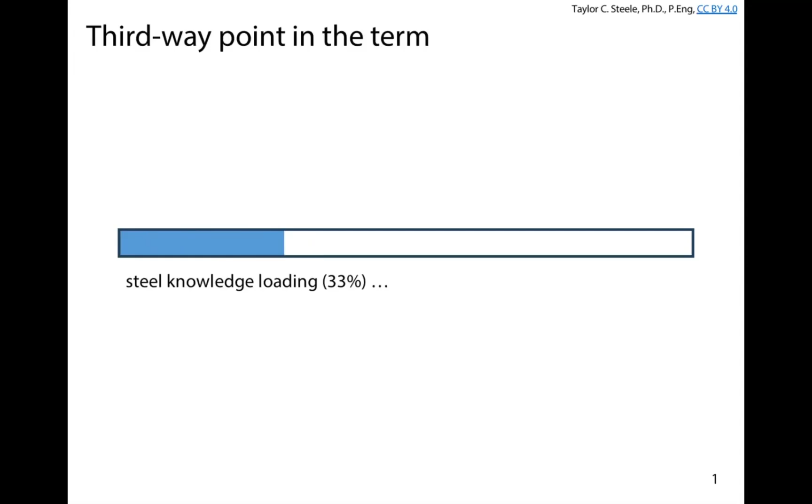Last day, we introduced the idea of designing, or starting to figure out what the strength of our tension members might be for our braces, for example. We looked at a couple of expressions — when something's in tension, we're pulling it apart. We can pull it apart in gross section yielding. This was the expression we used to calculate the gross yield resistance of the cross section. We wanted to stop the brace from yielding, because if the brace yields, it's going to stretch a lot, and that takes away the structural stability of our building when it's pushed laterally under wind, for example.

We also looked at net section fracture. One of the big differences, despite the fact the equations look similar, is that here we're looking at actual fracture, complete breaking apart of the cross section where it's reduced to accommodate the bolts. We need to connect these things somehow — when we poke holes in our braces to bolt them to the gusset plate, we're getting rid of some steel. So the area is smaller, but we let it yield locally a little bit because that's not really going to impact the stability of our structure. But once it reaches its ultimate breaking strength, there's nothing we can do — we lose all load carrying capacity, and there's nothing left to prevent the building from falling over.

The other big thing here was that one is a ductile mechanism, the other is a brittle mechanism. When we're dealing with ductile failure of structures, we want that to happen — not that we want failure to happen, but if it's going to happen, we want it to be ductile. So we had a different resistance factor, a slightly higher factor for yielding compared to net section fracture — 0.9 as a resistance factor for yielding, 0.75 for net section fracture — because we want to encourage a ductile failure mechanism to develop, if there is going to be failure.

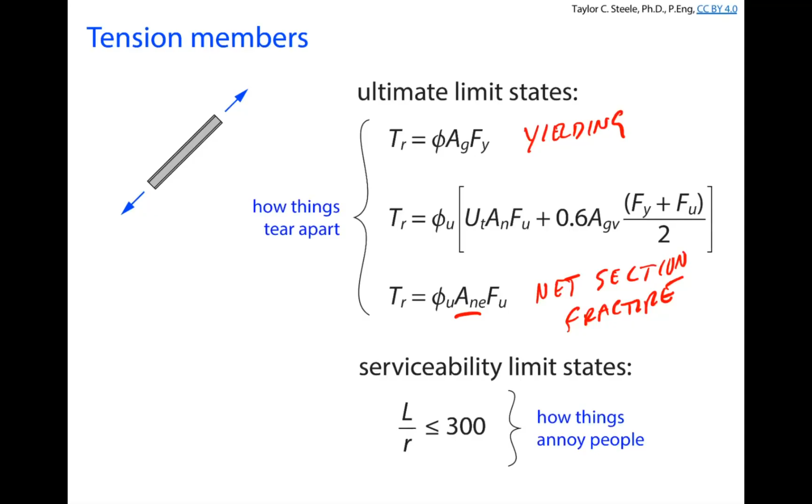Today we're going to talk about how the net effective area can be different depending on the bolting arrangement. We're actually going to see that there's more than one potential way we could get net section fracture to develop through our bolt holes. That's basically what we're talking about today — when the bolts are arranged in a certain way, how does that change the calculation for our net area in tension. The other day we introduced tension members and talked a little bit about net area; today we'll focus more on when it may or may not be different compared to what we looked at previously.

For example, in lecture the other day, we looked at this situation: a very simple pair of flat bar steel plates bolted to a thicker central plate. You saw in the video, once it fractures, it pretty quickly loses all load carrying capacity, and it tends to fracture across this net area through the bolt holes. The other day we looked at calculating the net area for an example brace in that school across the river, and found that was in fact the governing failure mechanism for that particular brace.

This is a very simplified case. I'd say most of the time it's probably good practice to arrange your bolts in some kind of rectangular pattern. It's easier to fabricate, easier to put together for the most part, and relatively simple to detail.

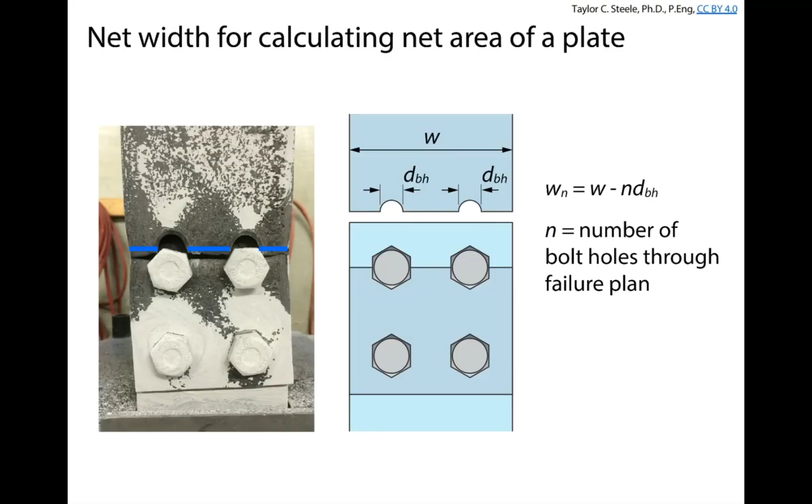From time to time, we may want to introduce something called a stagger in our bolt hole pattern. The reason we might want to do this is because it's possible to increase the net effective area. We're moving from a failure plane where we're removing 2 bolt holes from the net area to a potential failure plane where we're only removing 1 bolt hole.

If it's hard to make a connection work—for example, the specific brace in the example the other day, where maybe we want to resist a load higher than the 580 kilonewtons we were designing that flat bar brace for, and maybe the engineer didn't give us enough steel—remember, the engineer tells us what this needs to be, say a flat bar 15 by 150. Then you have to design a connection for that flat bar, and if you can't make a rectangular bolt hole pattern work, you may introduce a stagger to increase the net effective area.

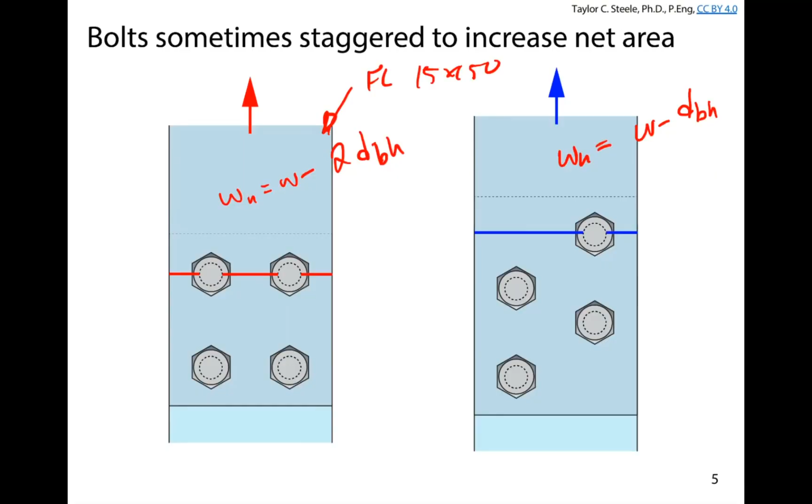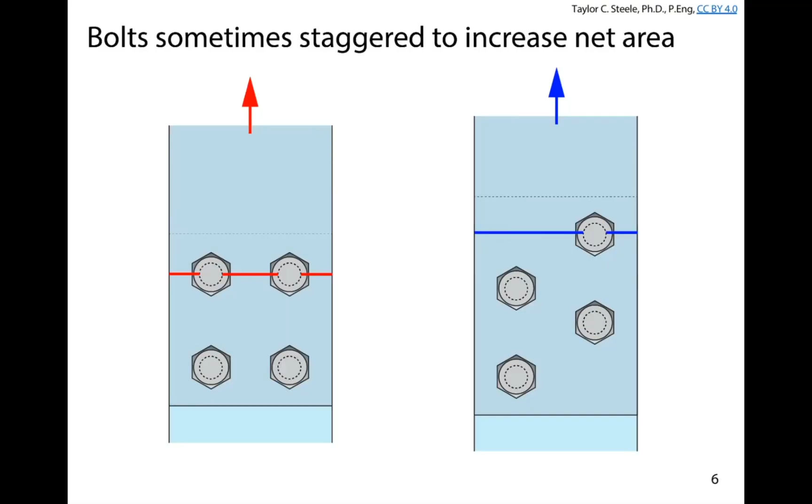By doing this, we're saying Wn in this case would be W minus a single bolt hole diameter, whereas in the other case Wn is W minus 2 bolt hole diameters. So we can potentially increase the net effective area by staggering the bolt line. The problem is that not only do we have the potential to get rid of one bolt hole, we also introduce the potential for two different failure planes—if we're not getting enough area through this bolt hole, the stresses may want to go back through that other hole, even if it's not aligned with the original.

Here we have one potential failure plane where Wn is W minus 2 bolt hole diameters, dBH. Up here we have another where Wn is W minus 1 bolt hole diameter. And down here we've got an interesting case—how exactly are we supposed to handle this situation? This looks a little weird, and it's not something we've looked at yet.

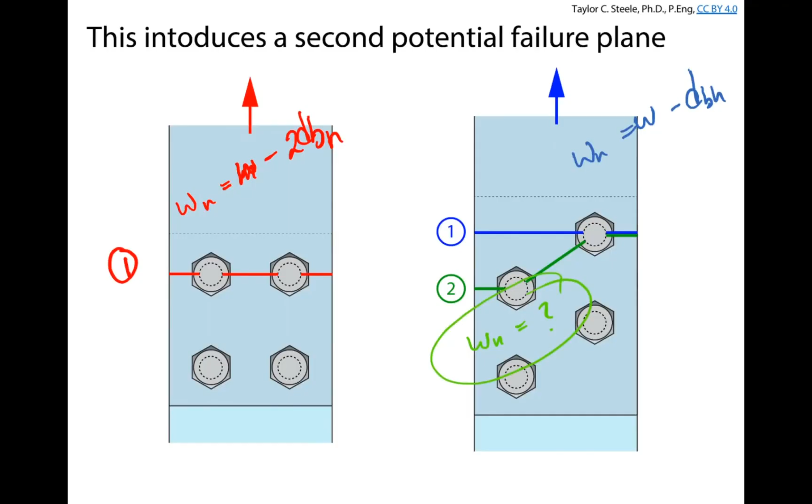Today we're going to talk about what happens when we start to stagger bolt holes. The motivation is to potentially increase the resistance to net section fracture, but in doing so we introduce new potential failure planes. It's our goal as the engineer to determine which failure plane is critical—how will this connection actually fail through these different planes—and how we introduce new calculations to figure out the increase in area.

I have an example here from those same connections I showed in the introductory lecture last Friday, with different bolting arrangements. I had one where the bolts were arranged one way, and another where I arranged them in an opposite symmetric pattern. When I pulled those apart, for the bolt hole pattern where the two bolt holes were closest to the load, we had net section fracture similar to what we looked at the other day.

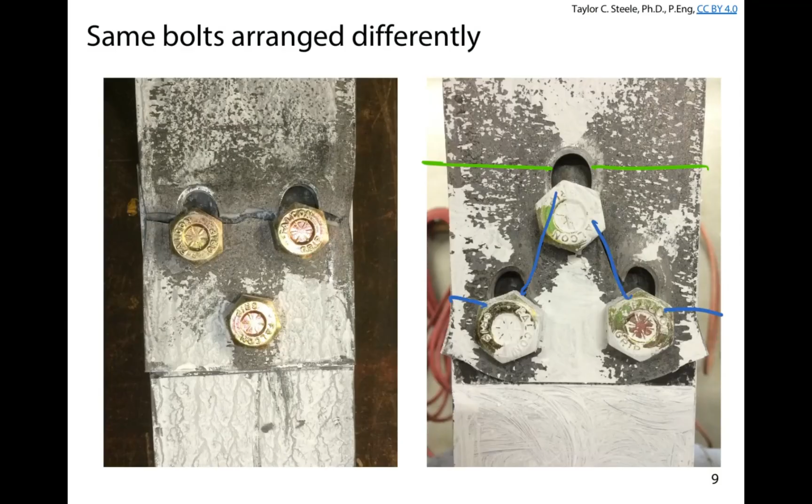But when we flipped the bolts the other way, we got a completely different failure pattern. There was potential to fail this section through the first line up here, and also potential to fail the bolts through something that looked more like this. So how do we handle these situations, and how does this change the resistance of our tension members?

After today, you should be able to identify these different failure planes when we introduce a stagger in our bolt hole arrangement, calculate the net area for different identified failure planes, and identify the critical net section. We'll say here are three potential failure planes—how do we calculate the net areas, which net area is smallest, because that's where stress will be highest—and calculate the net section fracture capacity for that bolt arrangement for that particular tension member.

Does anyone have any questions about these three things, why they're important, or what this staggering of bolt holes business might be about, before we get into the technical content for the morning?

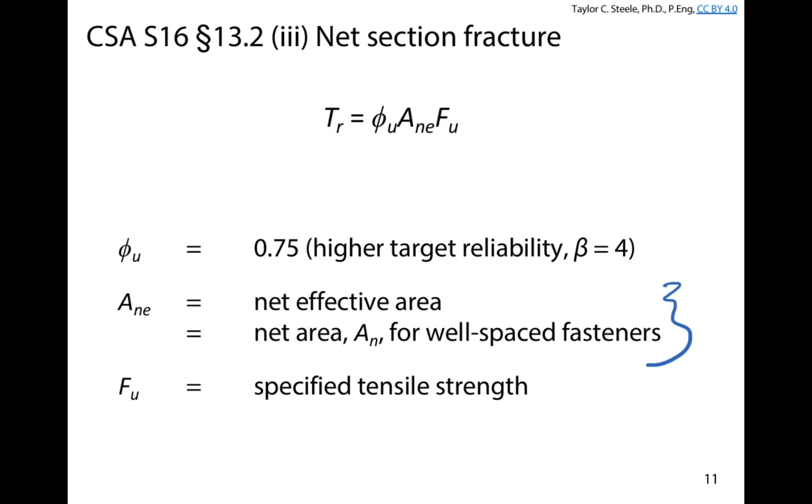So when we're dealing with these kinds of connections, we actually have a new part here. The other day I only showed you for a segment normal to the force, net area is W net times the thickness. But when we have segments that are inclined to the force, that's when we have a stagger. We've got some segments that are perpendicular to the force, and we've got one that has an inclined section to the force.

What we do is we calculate the same thing, WNT, as if there was no such stagger. I'll show you what that means in a minute. So we've got the net effective width as if it was straight through, or the whole section was perpendicular to the force. But when we have an incline, we're going to add on this empirical term.

You would like to think that when you have an inclined segment, the stress transformation kind of changes the way we do calculations, but we don't have any kind of stress transformation. This is actually an empirical equation that came from the early 1900s, and we've had more than 100 years and we haven't found a way to do this any better than what we've been doing since basically the 1920s. So we add on this additional term that basically deals with the geometry of that stagger.

We've got a gauge, which is basically the distance between bolts perpendicular to the load. We've got a pitch, which is the distance between bolts parallel to the force. And this is how we're going to be handling these kinds of calculations.

We might have one incline, we might have two inclines, and I'll show you some examples of where these might apply in different situations. But the one thing I will say is that this works really well for simple connections like the flat bars we've looked at so far. W is pretty straightforward; we don't have to do any kind of fancy calculations.

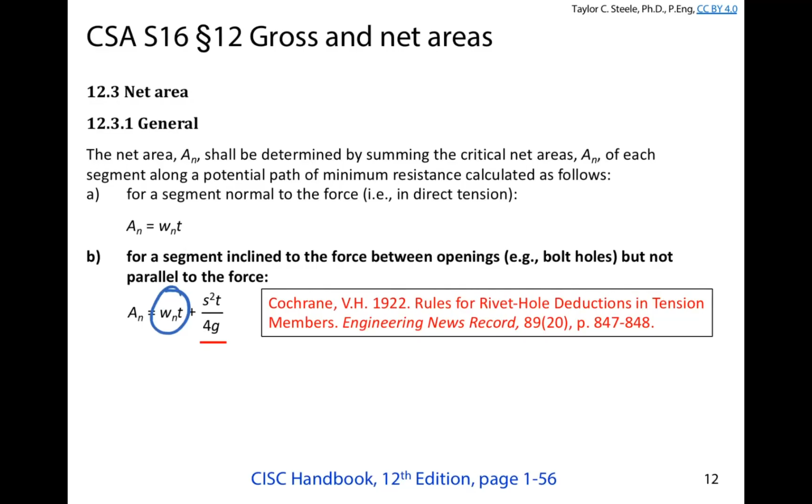The way it's written in the handbook isn't necessarily as clear as it should be; in fact, it's a little bit vague. So when I present it here, I include the summation sign. This is to account for the fact that there could be potentially more than one stagger, so we add the sum of the staggered components. If we have 2 or 3 staggers, for example, we need to add on the individual components dealing with that stagger that increases the net area.

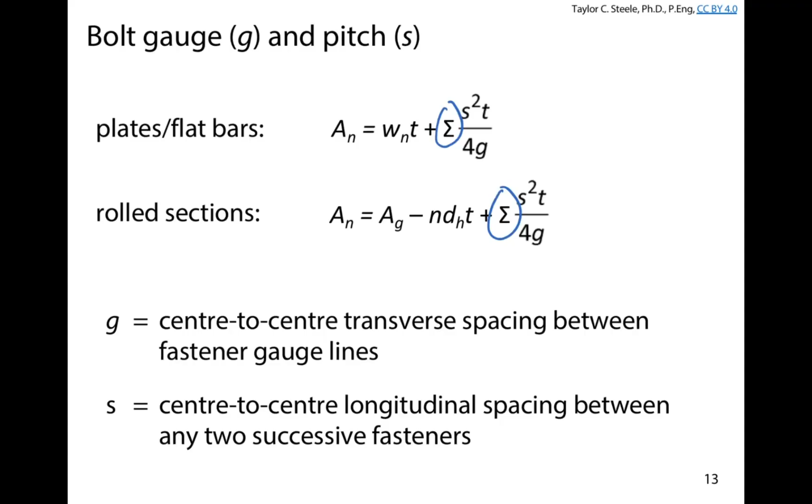Okay, so whenever you see S, you can just look at the slide. The most difficult thing to remember is which of these two things should be S and G. When you're saying, okay, I know it's S squared T over 4G, which of these dimensions is S and which is G? If you forget, you can just come to this slide. S is the pitch, which is the spacing between the staggered lines of bolts parallel to the load.

But then we add on this S squared T over 4G term. So basically we have the net area that we would have had if it was a rectangular set of bolts, plus the additional area that we might get from staggering those bolts by a pitch S.

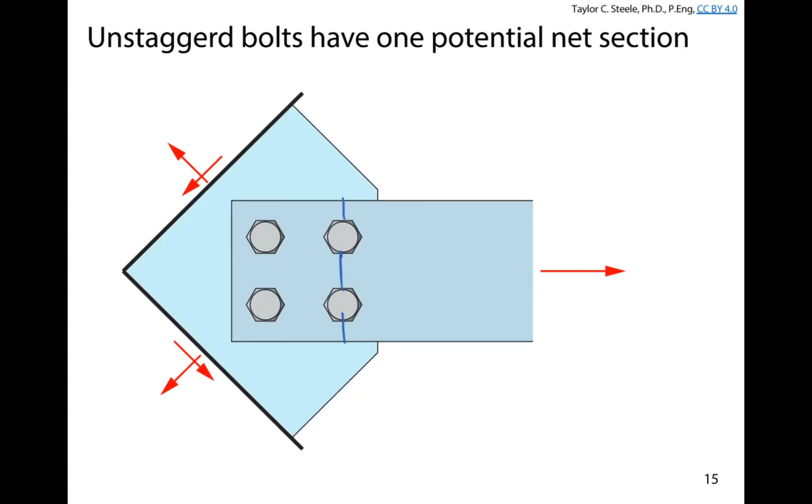first line of bolts that are closest to the load applied. Basically, what we expect to have happen when we have a rectangular set of bolts is it gets pulled apart across the first line of bolts.

And the reason for that is because steel is ductile as it approaches the ultimate strength, we're basically going to be assuming here, as we talked about in Lab 1 when we looked at the bolts in double shear or single shear for that problem on assignment 0, that these bolts all carry the load equally. So here we might have a factored tension force, 1.4 wind plus some other notional lateral loads or something like that. And we're basically going to assume that we have TF over 4 here, TF over 4, TF over 4, and

TF over 4. And if that's the case, if we look at a section back here, basically the stress that's going to be on this component, or going through this last line of bolts, if we draw the free body diagram, we have TF over 2 pulling to the left. So the stresses through this net section at the back, furthest from the applied load, are going to be half what the section experiences at the net section closest to the applied load.

Okay, so here we're assuming that the bolts share the load equally. And so by statics, there's no other cross section on this area that's going to have a higher stress than the one that's closest to the applied load, through the first row of bolts passing through there.

For example, we're also not going to get something like this happening, because we have TF over 4, TF over 4, TF over 4, and TF over 4. Basically, on this section now, we only have 3 TF over 4, so we have 3/4 of TF, which is less load, and we're increasing the net area because on that failure plane we'd potentially have a stagger.

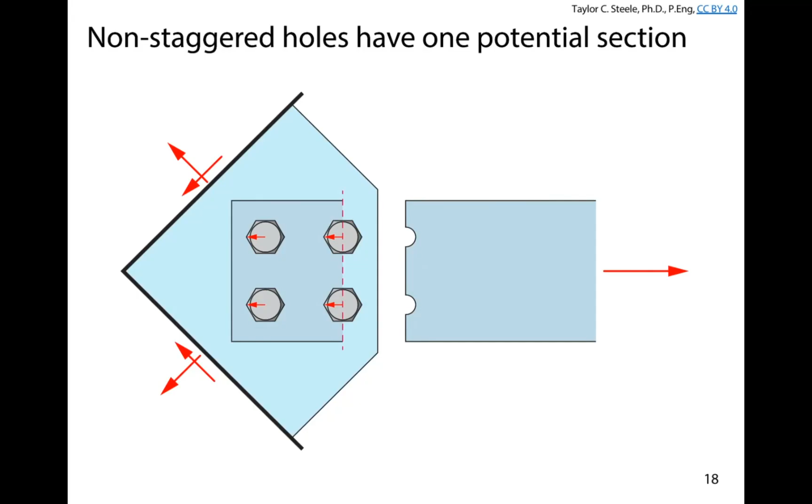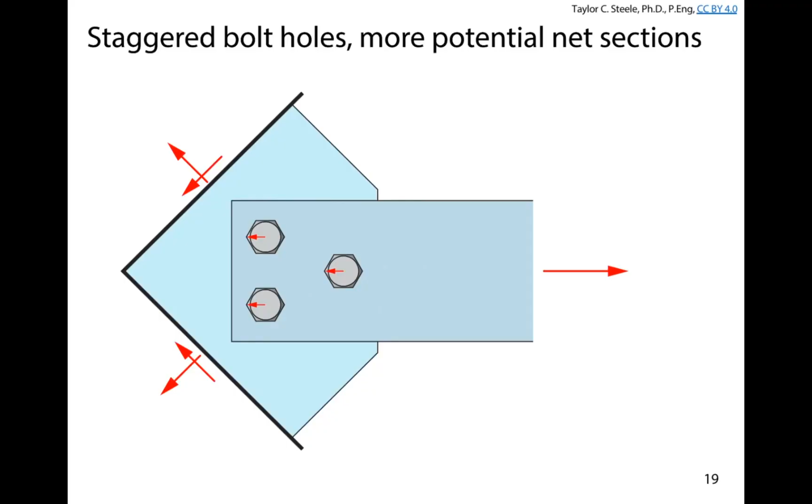When we start to increase a stagger - and this is not the best detailing, but it's nice to show academically what goes on here - now we've got a single bolt hole, and it's hard for us to necessarily determine what's going to happen here. It's possible that we'll get fracture through that first bolt, and that would be consistent with what we've talked about before.

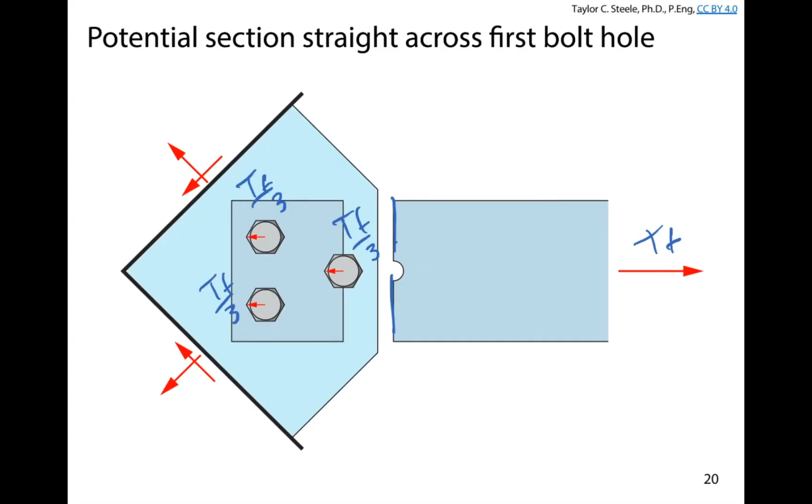In this case, we have TF, and we have TF over 3, TF over 3, TF over 3. Okay, so the bolts are sharing the load equally, and so the total force on this cross section is TF. We have TF over 3 on the other side, and we have a potential failure plane through that line of bolts. We would calculate this as AN equals W minus a single bolt hole diameter, times T, and that's it. We have no stagger on that particular failure plane.

It's possible to fracture the plane straight through that perpendicular section. We have one bolt hole and a perpendicular section, but it's also possible that we might fail at something like this, where now we're passing through 3 bolt holes.

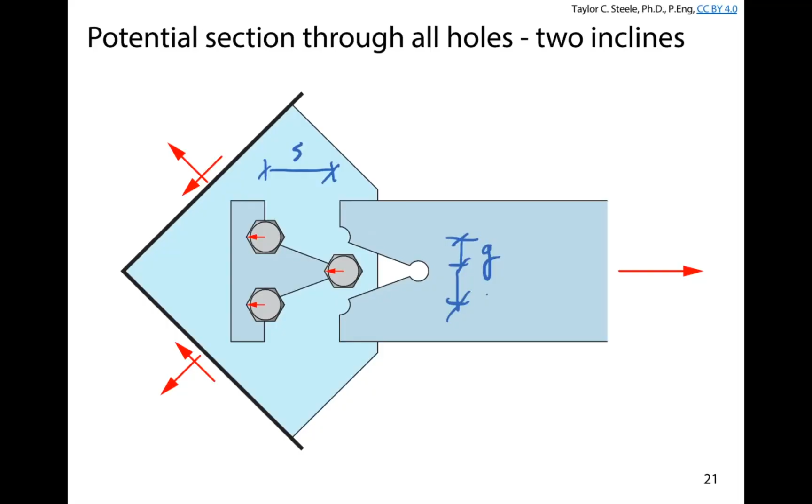So our net area gets reduced because now we're passing through 3 bolt holes, but we have stagger, and the stagger is going to increase our net area. So here, if I call this S, and if these were both G, let's just assume that G and S are both the same for both of these staggers here.

My net area would be W minus 3 bolt hole diameters times T plus 2 S squared T over 4G components. So this area, we don't know until we do the calculation if it's going to be bigger than the one we looked at on the previous slide, because we're removing more bolt hole diameters, since this plane would go through more bolt holes, but we're also increasing it because of the stagger associated with the incline segment between the first bolt and the back 2 bolts.

Basically we're saying, well, we're taking away 2 more bolt holes, but we're increasing some stagger. In our case here, we actually have to calculate this area. This might be AN1, for example, and we have to calculate this one, it might be AN2. The failure plane that's going to be most critical is the one where the area is the smallest, because when the area is small, the stress is higher, and we're more likely to get failure on that particular failure plane.

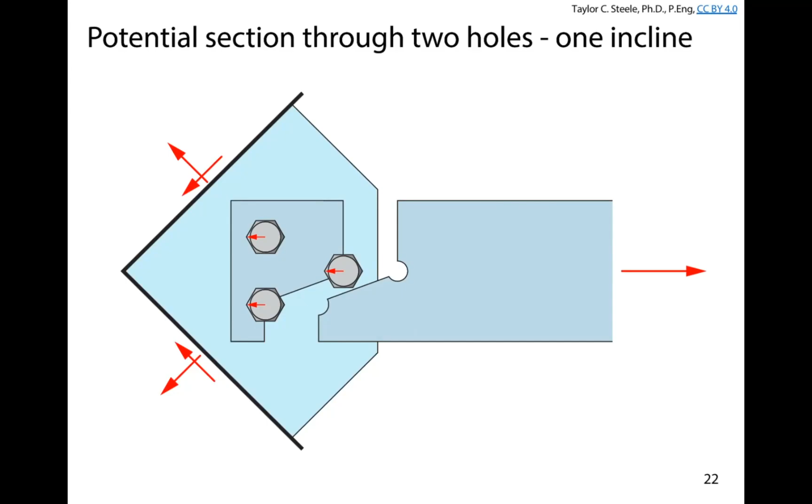Likewise, it's possible, I don't know how possible it is, but you'd have to calculate this - it's possible to get a slightly asymmetric failure plane. And so in our case here, now we've got just the failure through 2 bolt holes. So we might say AN3 is equal to W minus how many bolt holes for this particular case? 2. 2 bolt hole diameters times T. And in this case, we just have the single stagger on this failure plane. This is G, this is S, so we have plus S squared T over 4G.

So in our case here, there are 3 potential ways, and technically, if G and S were different for the other incline, there might be 4 potential ways for this thing to actually pull apart on the net section. It's important that we understand how to identify how we're going to potentially develop failure planes through each of these bolt holes, how many different failure planes we could have, and how to quantify the net area associated with each of these.

Basically, the secret is you never want to consider a failure plane where you still have a bolt that's basically attached to the piece that's pulling off, because that reduces the load acting on the remaining portion, and therefore reduces the load acting on the net section, and the net section almost always gets bigger. So a bigger area, smaller load - you know intuitively that that's not going to be a governing failure mode. A failure mode is one that can pass through any of the bolt holes as long as there are no more bolt holes attached to the piece that's getting pulled away.

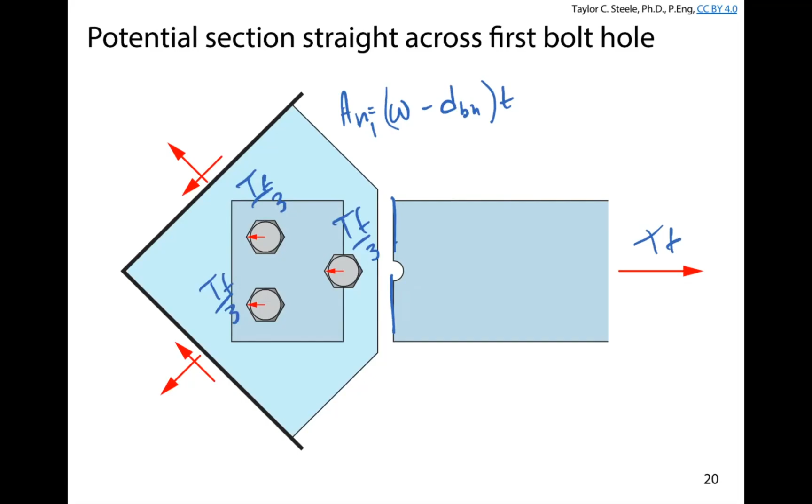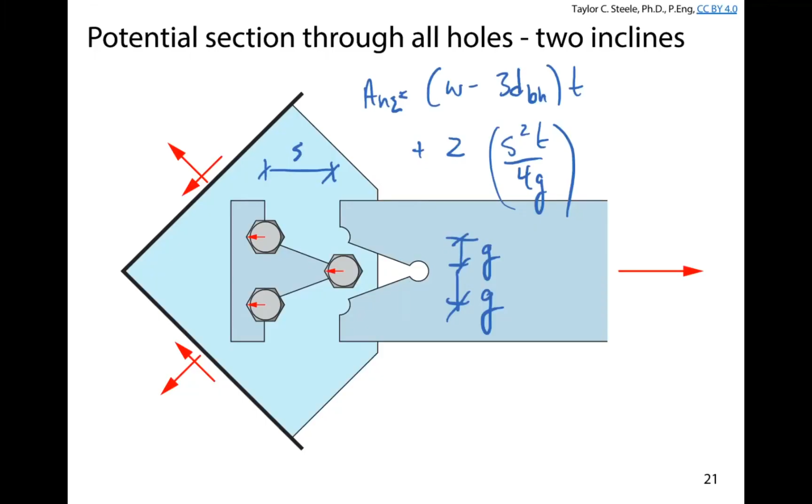So in this case here, this is a potential failure plane - we go through one bolt hole. This is a potential failure plane where we go through all of the bolt holes. And this is a potential plane where we go through two of the bolt holes, but never do we have a bolt left over on the piece that's getting pulled away. You should be able to cut this piece with some scissors through the holes and not have any full hole left on the piece that's getting pulled away from the applied factored tension force.

Does anyone have any questions about why these three failure planes are something that we should be investigating, or how we would calculate the net area associated with either or any of those three potential failures?

What would happen if one of the bolts pulled away with the other piece? What would be the significance of it? It wouldn't. That's the significance of it for the most part.

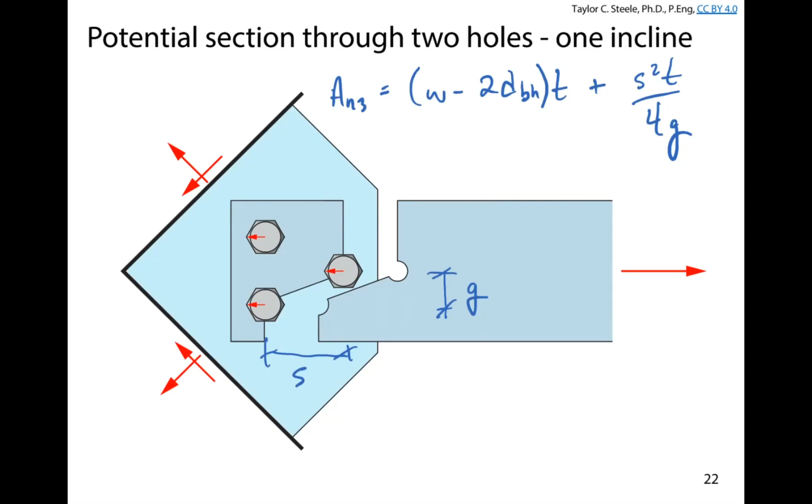It's very, very unlikely. Basically what's going on here, especially for most simple applications - it is possible, and I've actually done this before, because if you're bad at drilling holes, it is possible, for example, that we don't actually share the load equally. If one of the holes is really tight and the rest are loose, you're basically going to fail that bolt first, and then who knows what's going to happen. But any professional detailer knows how to drill stuff and put stuff together. So basically it's not that what would happen if this was the case - it's more that this could never be the case.

Right? So basically if we look at, we've got 1, 2, 3 bolt holes, or 3 bolts worth of load on that net section. And so the tension force here is basically 3/4 or 75% of the factored force, right? So we have 75% of the factored force acting on a cross section that's by definition bigger, right?

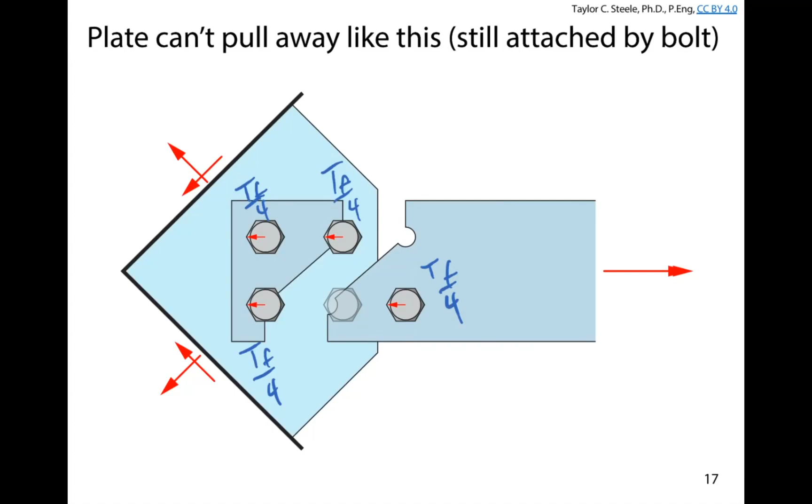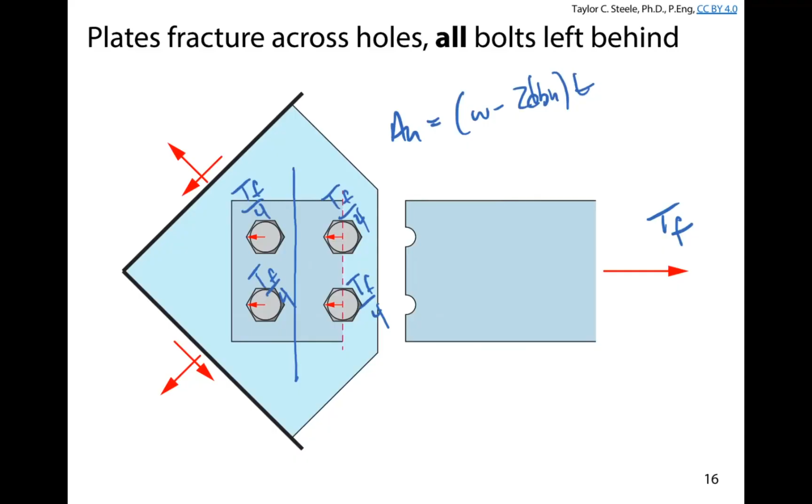Both the fact that we're reducing the load and increasing the area - in this case, AN is W minus 2 bolt hole diameters, T. Over here, AN is the same thing, W minus 2 bolt hole diameters times T, plus S squared T over 4G. So we have the addition to the net area of S squared T over 4G, and the reduction in the load by 25% acting on that cross section. It's just not physically something that we would have to check, because it's not physically something that would happen to that connection.

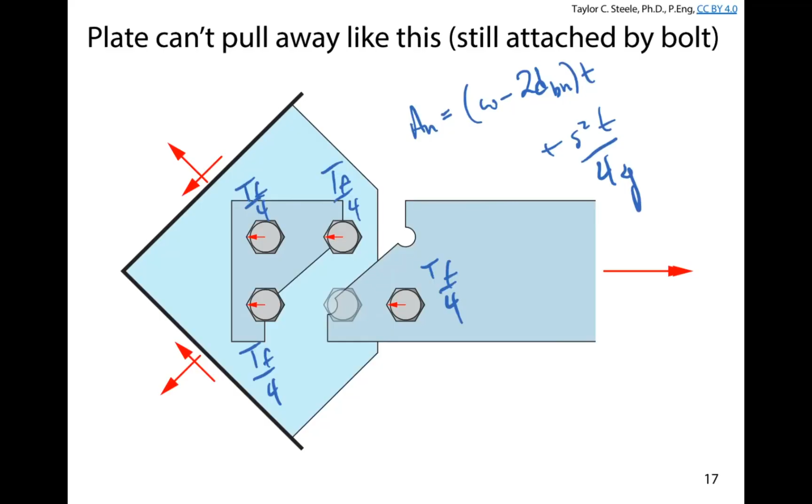Any follow-up? Okay, so with that in mind, a fun Poll Everywhere question, or at least one that I think is fun, just to try and hammer in what we just talked about for 20 minutes or so.

Which of the 4 options here for this particular connection is not a potential failure plane? Because if you cannot identify which one's not a potential failure plane, first of all, you're going to be wasting your time doing these kinds of calculations, and second of all, you're going to get the answer wrong.

This one always makes me feel happy. Nobody picks any of the other options, except perhaps that one. I think there's a joker in the class somewhere. So, the majority here is going towards the bottom left, option C.

Does anyone who picked option C feel comfortable sharing why they selected C instead of A, B, or D? Okay, C has one bolt hole above, so we just said that that's not very likely, so we don't use that for right now. Exactly, I just said that that's not something we should be looking at.

Basically, the reason is back here - we've got 2 bolt holes, there's not very much stagger. The net area might be plus or minus 5 or 10% to the others, but on that net area, we're losing 1/3 of the load, right? So we've got TF over 3, TF over 3, TF over 3. This one has TF over 3, and so if we try and pull apart something back here, on that failure plane, there are only stresses associated with 2/3 of the factored force, and the area is more or less the same. There's no way that that's actually going to happen.

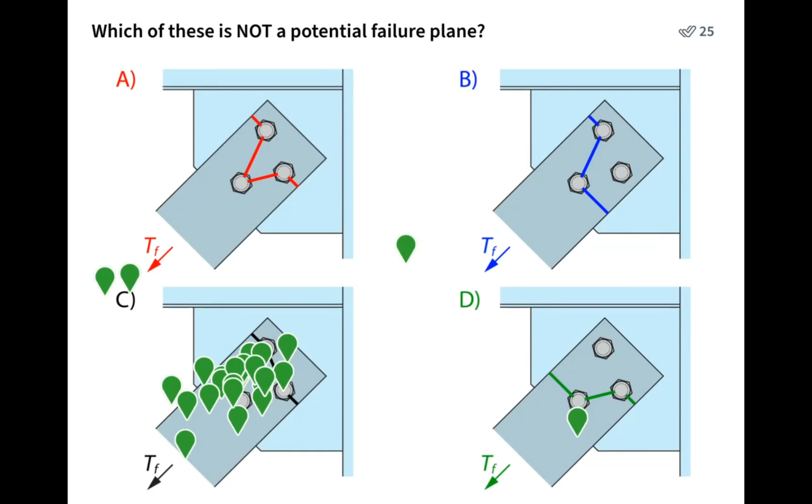Well, we can go back here - whoops, what am I doing here - we can go all the way back to this slide. And if I get rid of some stuff, we're basically looking at more or less this one over here. It's very similar to this situation. So let's just say G1 is equal to G2, and here S1 is obviously bigger than S2, right? And so just like our Poll Everywhere question here, similar in terms of what's going on.

And basically what we're comparing potentially is the blue one, which passed something like this, to the green one, which passed something like this. Is the green one or the blue one going to have more net area? How do I figure it out?

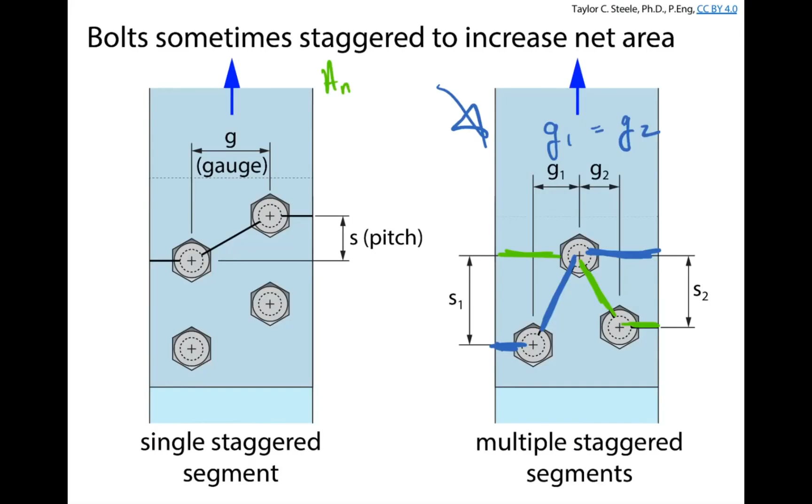Well, for both of them, AN is going to be W minus 2 bolt hole diameters, T, plus, we're going to have either S1 squared T over 4G, or S2 squared T over 4G. So this is going to be the same for both of those planes. But then we add on either S1 squared T or S2 squared T over 4G. Which one's going to result in the bigger area?

S1 squared, right? Because G is the same, S1 squared T over 4G is going to be bigger. So that makes it more likely that S2, or the green failure plane, will have a smaller net area, okay?

So if G1 and G2 are equal here, you don't necessarily have to check the blue pattern, but you do need to check the green pattern. And again, if you can't identify that, that's fine. But you should be able to look at these two and say, the net area in terms of bolt hole reduction is the same, but I get a bigger stagger on the blue side than I do on the green side. That means the green side here is going to have a smaller total net effective area. Are there any questions about that?

How many potential net area failure planes in this case? If G is equal but S is different, will it be 3 or 4? How many do you think there are? Three? So I would agree, if we just went through the process of elimination that we just did, right?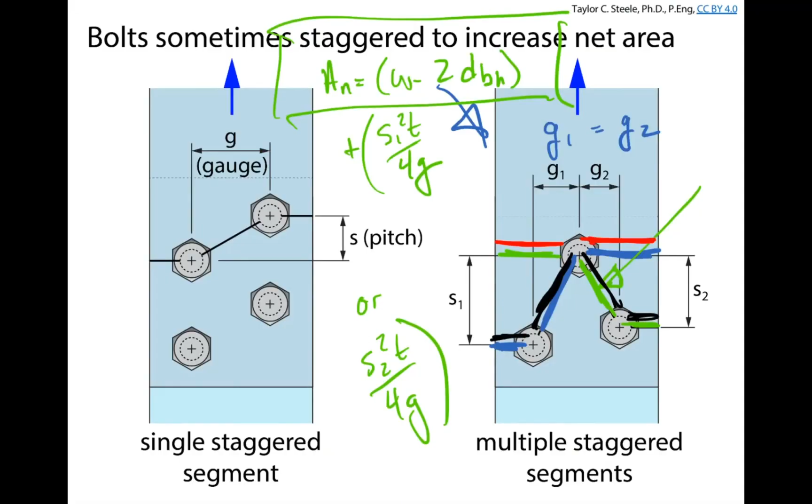There are 4 potential failure planes here. By elimination, if G1 and G2 are equal, we could get rid of the blue one. Or if S1 and S2 were equal, we would base it on which one had the smallest G value, right? So if G1 is different than G2 and S1 is different than S2, here we've got 4 potential failure planes on the right-hand side. Over here on the left, just to provide some completeness, we've got a potential failure plane there, and we have a potential failure plane here. So on the left-hand side, we just have 2 potential failure planes introduced by that single stagger.

So for symmetric stagger, basically every stagger introduces one new potential failure plane. But if the gauge and pitch are different, there's the potential to add more than one.

Okay, well, let's see if we can put this into a more practical context. If we revisit the example that we did the other day, where we were looking at this brace and its connection for that building across the river, we might remember that we had a flat bar 15 by 150 that had a factored tension force from the structural analysis results of 580 kilonewtons. The engineer of record would put 580 kilonewtons on the drawing, send it off to the connection designer. They said, we picked 15 by 150 flat bars, we need to make the connection work.

And we had 8 bolts that were 5/8 inch, and they had a certain pattern. Let's just say they were doing all this work and someone opened up the new building code that's going to be coming out soon. So for example, for us, that might be NBC 2025. And there's no onus on anybody to say, okay, well, there's this new building code coming out, so we've already designed this, we have to change it for the new building code. That's never the point of updated building codes.

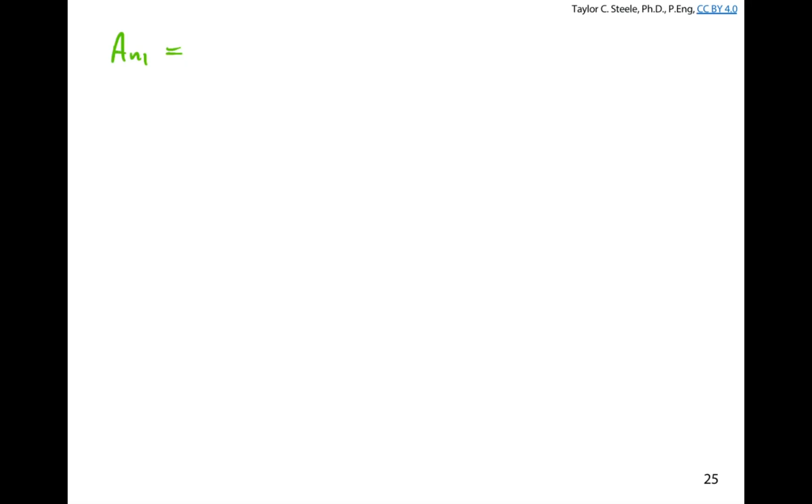Okay, here I'll take over for the rest of this one. We'll go into this now. So we're going to look first at AN1 for the first potential failure plane. AN1, we'll always write it out as W_n*T plus the summation of S squared T over 4G.

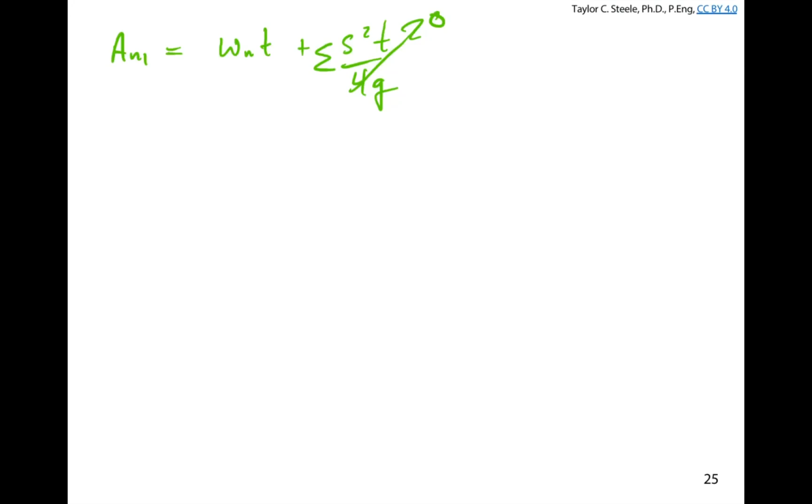Do we have a stagger on potential failure plane 1? No, that's 0. How many bolt holes did we pass through? 1, right? Math is not hard, it's how you apply it that can be difficult. So basically we just have W_n*T.

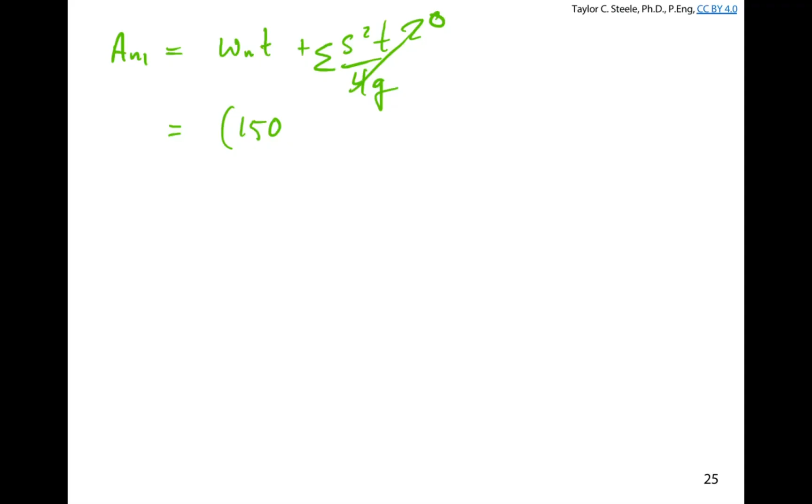Our gross width W is 150 millimeters. We're subtracting 1 bolt hole diameter. Does anyone remember what the bolt hole diameter was from class the other day? Drilled, it was 17 millimeters, right? I'll write this here: D_BH is 17 millimeters, that comes from the handbook for 5/8 inch bolts with drilled holes. So it's 150 minus 17 millimeters, multiplied by T, which is 15 millimeters.

Our net effective area here, if someone wants to do that calculation, that'd be helpful because I have yet to open up my solution sheet apparently for that one. And I'll give you an opportunity to practice doing calculations like that on your calculator.

Can you repeat that a little louder, sorry, Katie? 1,195? 1,185? 995? 1995, that sounds familiar, I'm pretty sure I remember that number. Yeah, 1995 millimeters squared. Okay, does anyone have any questions about that calculation, what numbers went in it, or how we got that number? Okay.

AN2. How many staggers do we have? 1. How many bolt holes do we pass through? 2. It sounds like a kindergarten class, 1, 2, 3. Joking aside, we have again W_n*T plus the sum of S squared T over 4G.

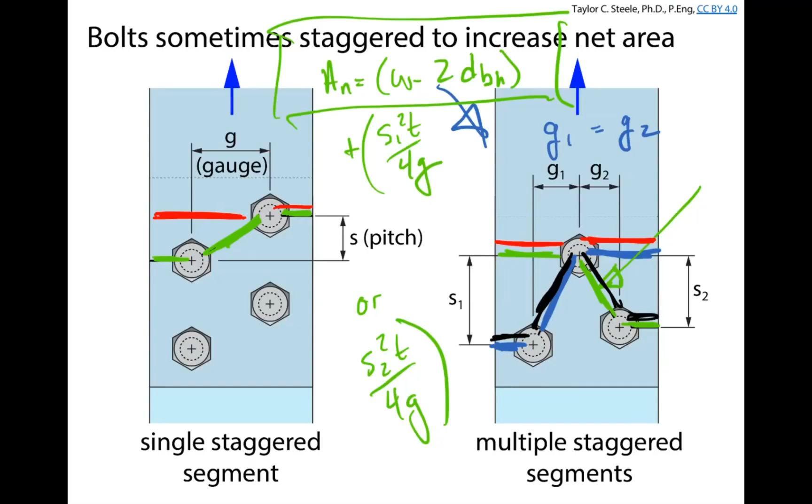Well, if you forget, you can go to this slide. S is 45 millimeters, the distance that the bolts are staggered by, parallel to the load. G is the gauge, the perpendicular distance between the bolts. So here, this is G, which is 80, and this is S, which is 45.

So I'm going to add on 45 millimeters squared, all times T. Oops, I missed the 15 millimeters here, sorry, times 15 millimeters. This is also times 15 millimeters, but divided by 4 times 80 millimeters.

Right, so here we're subtracting one more bolt hole. We're reducing the area by the extra bolt hole, but we're also increasing it to account for the stagger. So it's not immediately clear before we do the calculations which is going to be larger. I'll let somebody do that calculation. I have the number here, but it's good to practice doing these kinds of things on your calculator.

Does anyone have an answer for that?

In the first example, why did we deduct only one bolt hole? Couldn't it be two? We only deducted one bolt hole because the way that this would rip apart is just through that one bolt hole. So in our case here, it's possible that we'd pull this piece away by breaking it through that net section, and on that net section there's only one bolt hole. Because basically here for the green one, if we pulled this away it would look something like that, so we're only subtracting the one bolt hole diameter.

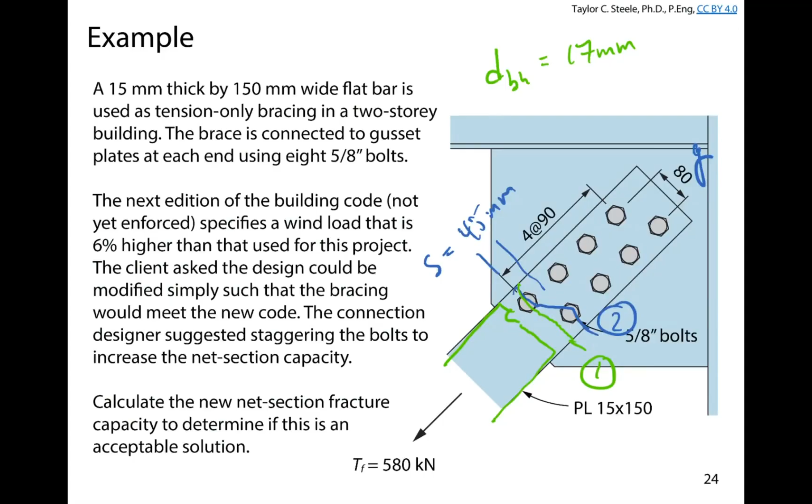The original design was not staggered. And in the original design, we did minus 2 bolt holes, right?

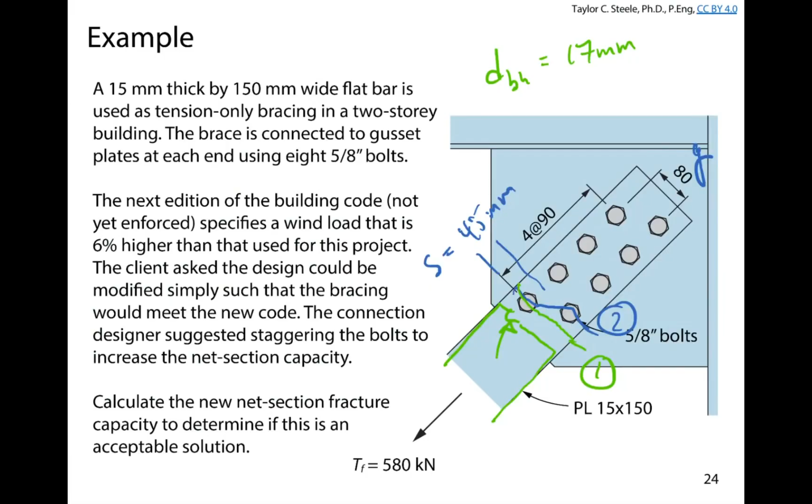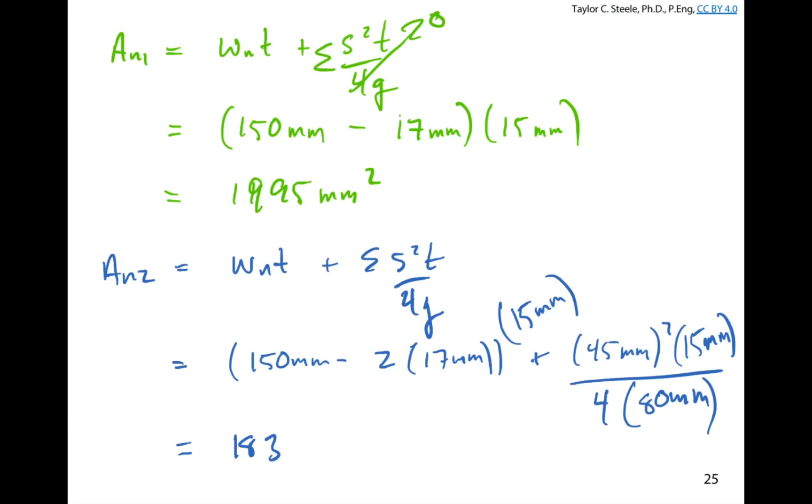So I also get 1835 millimeters squared. Okay, so potential failure plane 1, 1995 millimeters squared. Potential failure plane 2, 1835 millimeters squared. Which of these areas do I use to calculate the resulting net section fracture resistance?

Bigger one or the smaller one? Smaller one. Smaller area, higher stress. The same load is present on both of these areas, and so this is going to be my critical net area, and that's the one I'm going to use to calculate the net section fracture resistance.

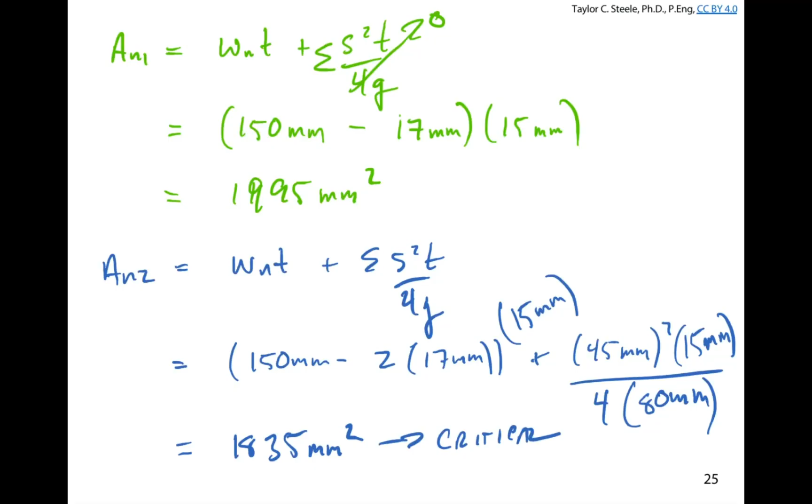Okay, so, whoops, that's what I want to write. We still have a problem to figure out here. We're updating our net section fracture resistance, phi U, ANE, FU. Again, here we just got flat bars. Whenever you have a flat bar connected by bolts, the ANE is equal to AN. We'll talk about other situations on Wednesday this week.

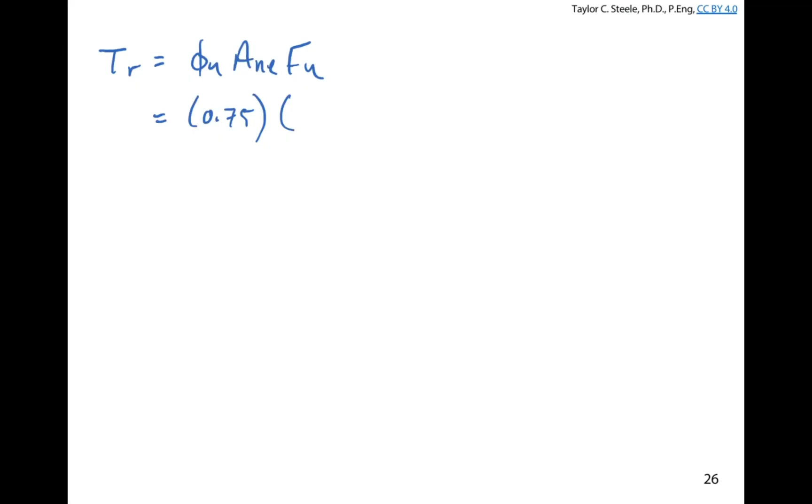But for now, we've got 0.75 times the critical value, which is 1835 millimeters squared, times FU, which is 450 MPa. I get a net section fracture resistance, doing that calculation, of 619 kilonewtons.

What did we have the other day? Is that bigger than what we had when we didn't stagger the bolts? We'll compare this to the old TR, which is 587 kilonewtons when we did not stagger the bolts. And so we got a resistance increase by staggering the bolts by that 45 millimeters. If I was trying to figure out what that is, 619 over 587, that is a 5.4% increase in the net section fracture resistance.

Now, thankfully, we're trying to make up a 6% difference, but TR was already a few kilonewtons bigger than what it needed to be. So let's figure out what the new TF value would be. TF before was 580. We're increasing that by 6%. 580 times 1.06 is 615 kilonewtons. So we only increased our resistance by 5%. We needed 6%. Thankfully, we already had 7 kilonewtons more than we needed, so that helped us.

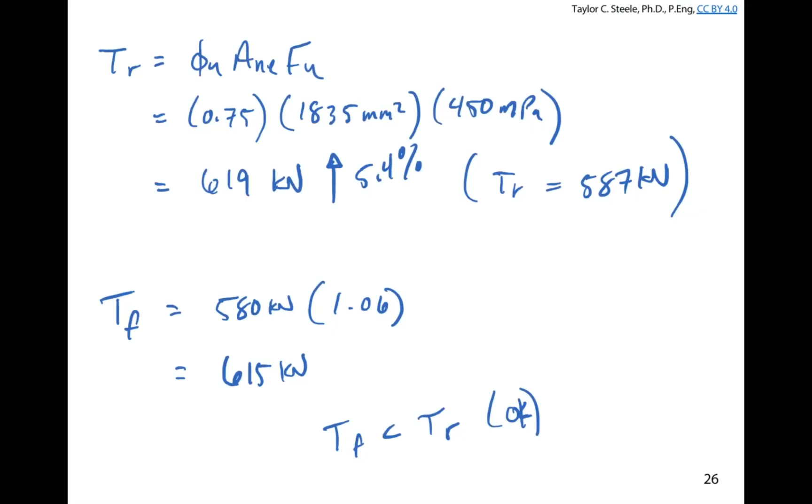All right, well, those are the important things then. You should be able to identify potential failure planes through bolted connections with staggered bolts, calculate the net area for different identified failure planes when accounting for the staggers. Most importantly, identify the critical net section and calculate that net section fracture resistance.

Does anyone have any questions about anything that we've talked about this morning before wrapping lecture up?